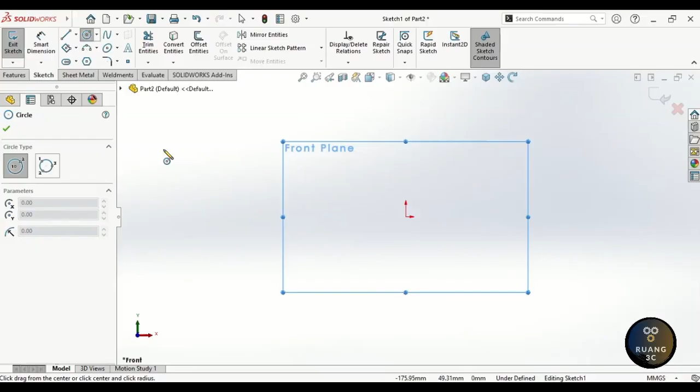In the Feature Manager design tree, click on the front plane and select Sketch. Activate the Circle command and move the cursor to the origin. We'll see a yellow square which indicates a coincident relation.

Click to set the center of the circle at the origin. Then move the cursor outward to define the size of the circle and click again to confirm.

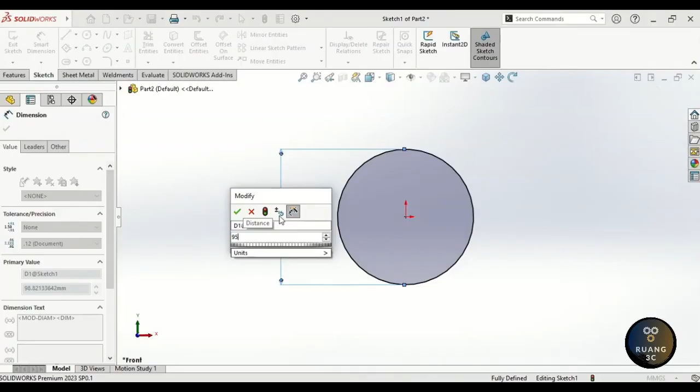Now let's assign a dimension to the circle. Turn on the Smart Dimension command, click on the circle, then move the cursor outward and click again to place the dimension. When the Modify box pops up, type in 95 millimeters as the diameter, then press Enter to confirm.

Head over to the Features tab and click on Extruded Boss Base. In the Direction 1 section, make sure Blind is selected from the drop-down. Set the depth to 6 millimeters. Hit OK to complete the operation.

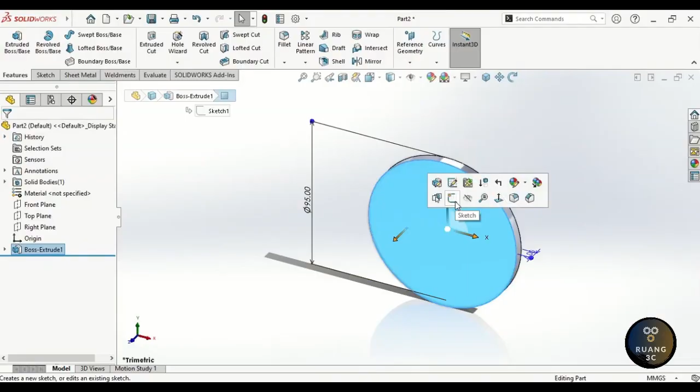Let's add another sketch. Click on the front face of the model, then hit Sketch. Now activate the Circle command and draw a circle at the origin as the center of the circle.

Using Smart Dimension, click on the circle, move the cursor out, click again, and type in 30 millimeters as the diameter. Press Enter to confirm. Head back to the Features tab and click on Extruded Boss Base. Set the depth to 3 millimeters with Blind as the direction. Then just click OK to finish it off.

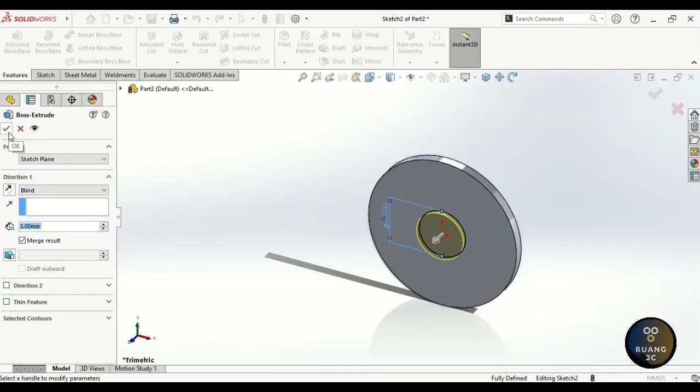Next, click on the face we just extruded, then select Sketch. In the Sketch tab, select Offset Entities. The Property Manager will pop up on the left. Enter 3 millimeters as the offset distance, then check the reverse box to offset it inward. Click OK to complete the operation.

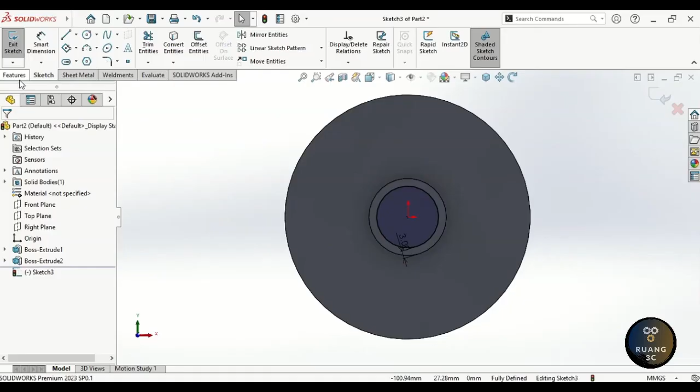Next, let's cut through it. Head over to the Features tab and select Extruded Cut. In the Direction 1 drop-down, choose Through All. This makes sure the cut goes completely through the body. Once that's set, click OK to complete the operation.

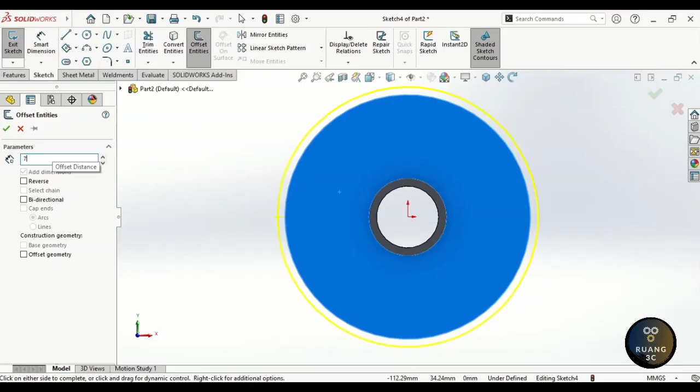Next, click on the front face of Boss Extrude 1, then click Sketch. In the Sketch tab, select Offset Entities. Enter 7 millimeters as the offset distance, and don't forget to check the reverse box to offset it inward. Once everything's good, hit OK.

Let's add one more offset. Select Offset Entities again, then click on the edge of the middle circle to create another offset circle. Enter 7 millimeters as the offset distance. This time we're good, no need to check reverse because the direction is already correct.

Hit OK. Activate the Line command and draw a vertical line starting from the outer circle to the inner circle on the top side. Make sure to apply the coincident relation at both ends and follow the vertical relation for a clean, straight line. To draw another line in a different position without exiting the command, just double left-click.

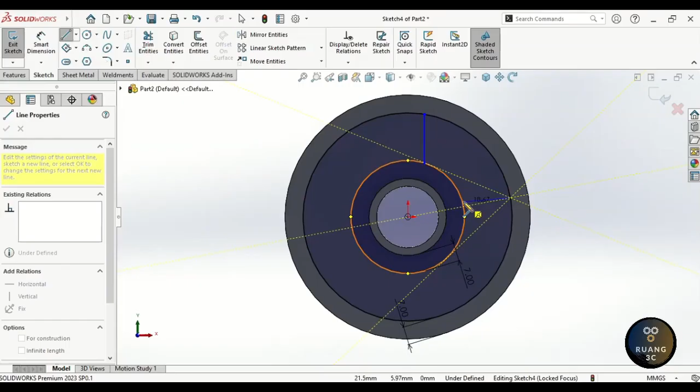Now let's draw a horizontal line on the right side, starting from the outer circle to the inner circle. Just like before, make sure to apply the coincident relation at both ends and follow the horizontal relation to keep everything aligned perfectly. All right, let's add some dimensions.

Turn on Smart Dimension, then click the origin and the vertical line. Assign the distance to 7 millimeters. Now do the same with the horizontal line: click the origin and the line, then set the distance to 7 millimeters as well.

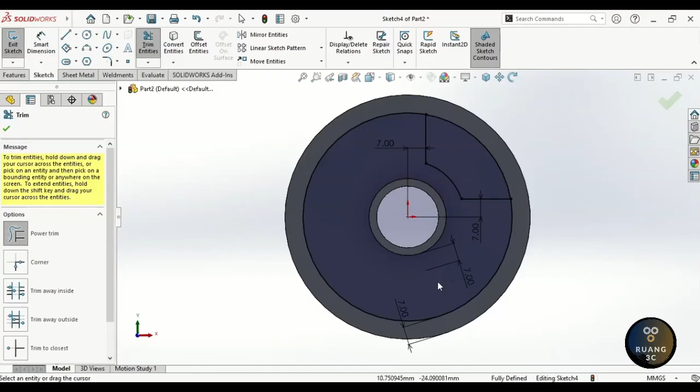Activate the Trim Entities command. Now hold down the left mouse button and drag across the lines we don't need. All right, let's smooth out those sharp corners with some sketch fillets. In the Sketch tab, click on Sketch Fillet.

First, select the 2 points on the outside corner and set the fillet radius to 7 millimeters. Now do it again, but this time for the 2 points on the inside corner and set the fillet radius to 12 millimeters. In the Sketch tab, select Mirror Entities.

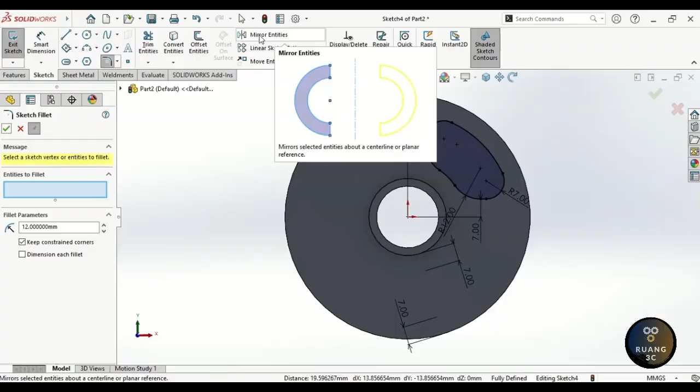The Property Manager will pop up on the left. Using a box selection, click and drag to cover all the sketch entities we want to mirror. Then under Mirror About, click the tiny icon in the top left corner of the graphics area to drop down the design tree. From there, choose Right Plane as our mirror line. Click OK to complete the operation.

Head back to Mirror Entities. Use box selection again to grab all the entities in the sketch for entities to mirror. Now switch over to Mirror About, and this time select the top plane from the design tree. Click OK to complete the operation.

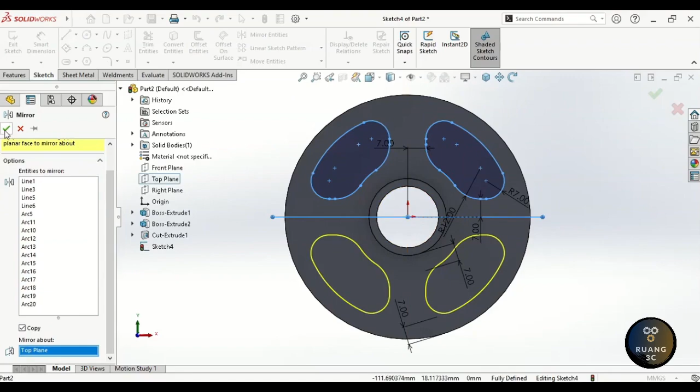Now let's cut that shape through the entire model. Head over to the Features tab and click on Extruded Cut. In the Direction 1 drop-down, choose Through All. Click OK to complete the operation.

Next, click on the edge of the inner extrude. The Context toolbar shows up. From there, click on Fillet. Now in the Property Manager, set the radius to 3 millimeters. Click OK to complete the operation.

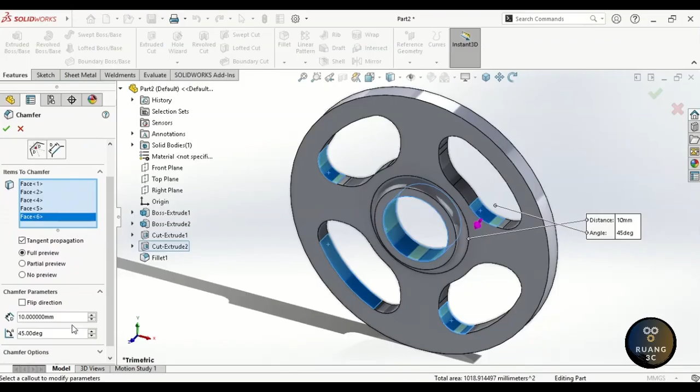Now click on the cut surface, and from the Context toolbar, select Chamfer. In the Property Manager, make sure the chamfer type is set to angle distance. Click on the other cut surface to add it to the Items to Chamfer list. Set the distance to 10 millimeters. Once everything looks good, click OK to complete the operation.

Great, now let's save our work. Click the Save icon at the top left corner. In the File Name field, type Flywheel. Then hit Save. All right, time for the next exercise.

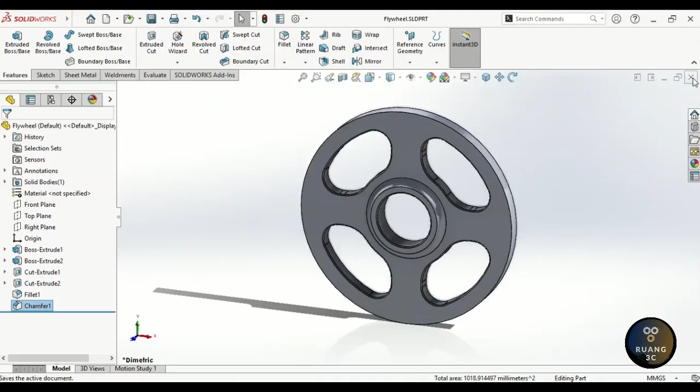Close the current file. Then, from the New menu, create a new part file. For this exercise, we'll be designing a combination spanner, 17 millimeters. So let's get started.